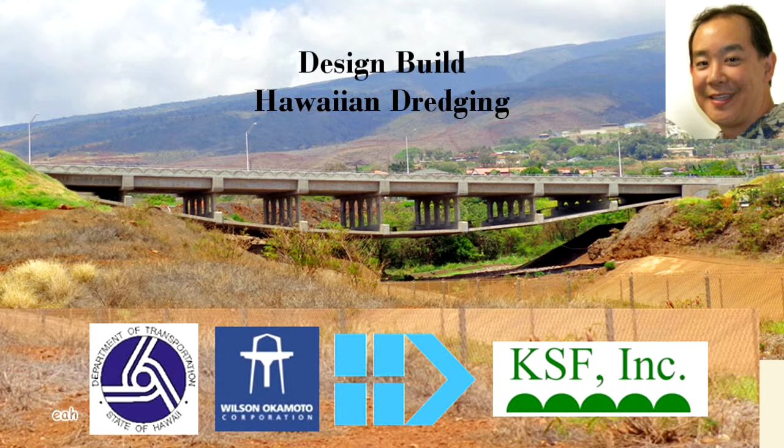Just a funny fact on them, a neat fact on them, is that this is their 110th year. They were started in 1904. Design-build consultant team, Wilson Okamoto, led the design team, and we also did civil engineering and environmental planning.

KSF, Eric over here, was our structural engineer of record. We also used GeoLabs, our geotechnical engineers. As you can see here from the rest of the team, we were a pretty highly qualified team. We had landscape, electrical, cultural and biological consultants as well. The team really worked well together with Hawaiian Dredging, leading the design and the construction on this design-build project.

From that, we communicated really well, we worked well together, and it was nice to get recognition from our peers. We received ASCE Outstanding Civil Engineering Award for this project. Another notable one is the ACECH Grand Conceptor Award.

I just want to go over a few project highlights before I really get into the details of the project. This is the Kahoma Bridge. It's the highlight of the project. It is a 360-foot concrete tied arch, or inverted arch bridge over Kahoma Stream, which is dry at the moment, and the bypass highway is on top.

Another feature designed by KSF, it should really say KSF Structural Engineers across the rail, the advertisement. But this is a 130-foot span, precast, parabolic arch girder bridge. It's a grade separation bridge, so the Lahainaluna Road is on top, the bypass highway is on the bottom.

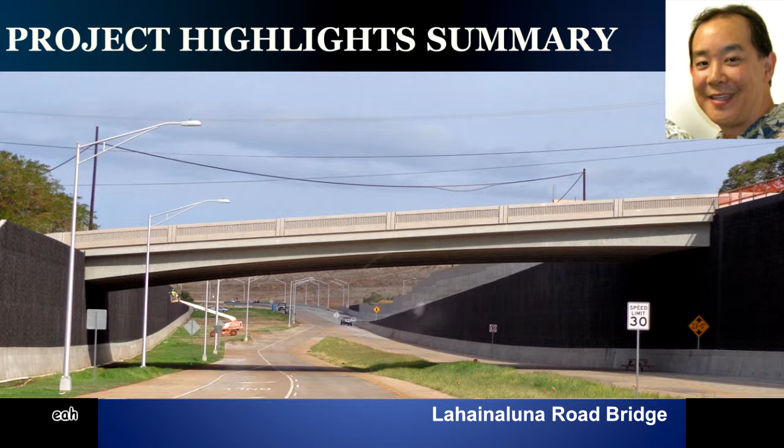This arch over here gets less than 4 feet deep. That was pretty amazing structural engineering by Eric. Unfortunately, he won't have time to go over this bridge today. We'll be focusing on the Kahoma Bridge in the latter half of this presentation.

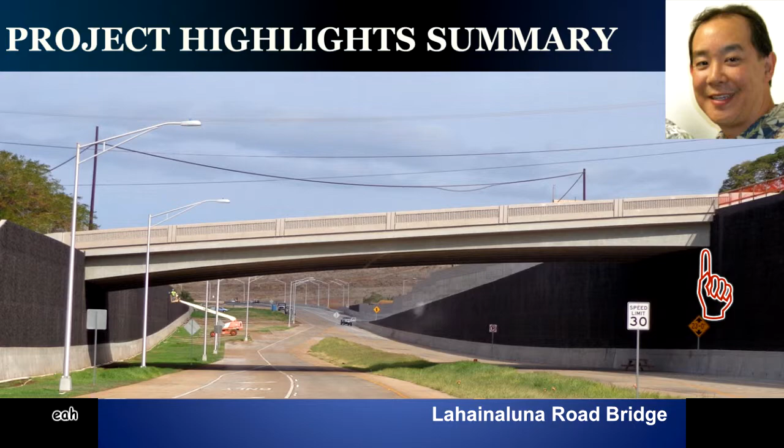Notice that this is 4 feet here. This retaining wall is another highlight of the project. That's a 35-foot tall retaining wall that GeoLabs here helped us design. We can see we're putting in some lava rock panels over it to help with aesthetics.

But the real feature of the wall, not shown here, is the anchor that's installed in the heel of the footing. There's an anchor that goes about 20 feet below the wall, spaced about, I think, 15 feet on center. That was a unique design that helped us reduce the thickness of the wall and reduce the size of the footings. These are pretty tall walls, L-shaped cantilever walls, all concrete.

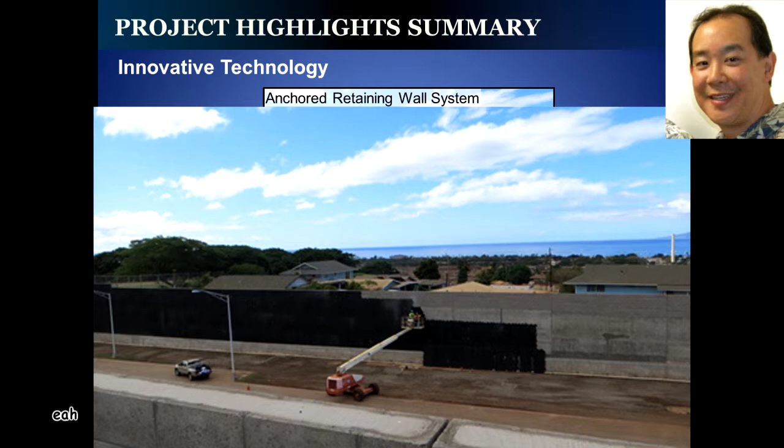Another feature from GeoLabs is the geotextile fabric wall. We were able to use on-site excavated material, and we crushed it and folded it up in the geotextiles and compacted it to make fabric, to make fill walls.

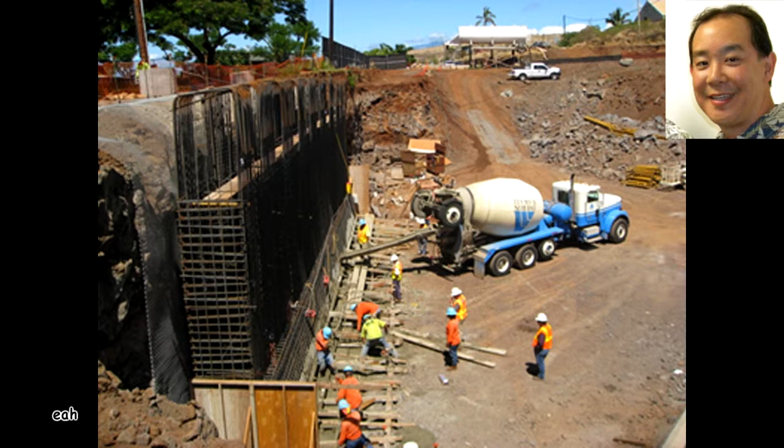Another feature of the project is the high-performance concrete. Again, going back to KSF and their excellent engineering on this project, they actually tailored concrete mixes for each component of the bridge, and in this case we see them pouring the abutment for the Lahainaluna Road Bridge. The mixes were tailored for workability, or to reduce shrinkage, or to increase the compressive strength. And some of the cylinders that we cracked were over 11,000 psi.

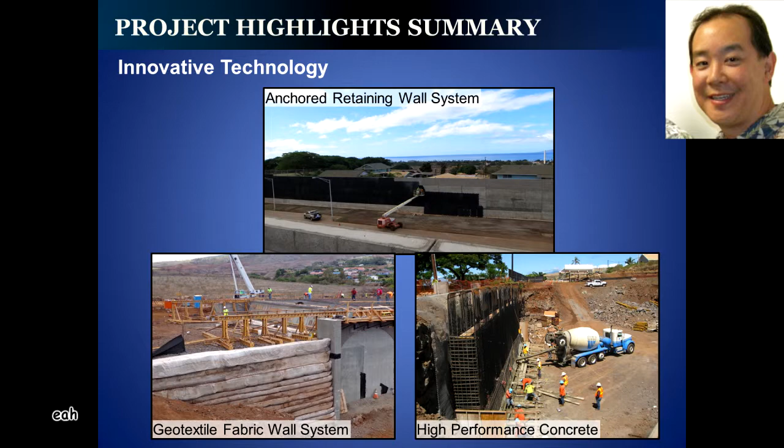As mentioned before, the project was very sustainable from an earthwork perspective. We used all of the excavated material either on-site or on the subsequent phase, the 1B1 phase of the project. It was used as general road fill or it was used as trench backfill material. We crushed it for aggregate base course, and we also used it in the MSE walls.

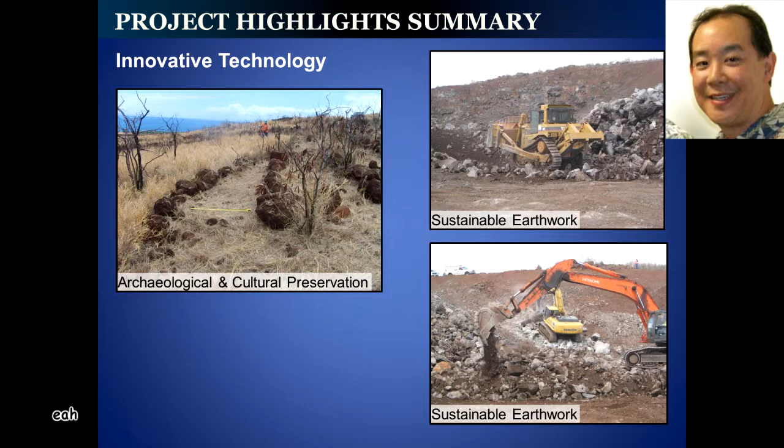Finally, right before the project was actually ready to construct several years ago, archaeologists discovered new terraces or archaeological features. We actually had to rush and redesign the highway to avoid and protect these, and Laura will go over that in just a few minutes. So you got to bear with me for a little bit more.

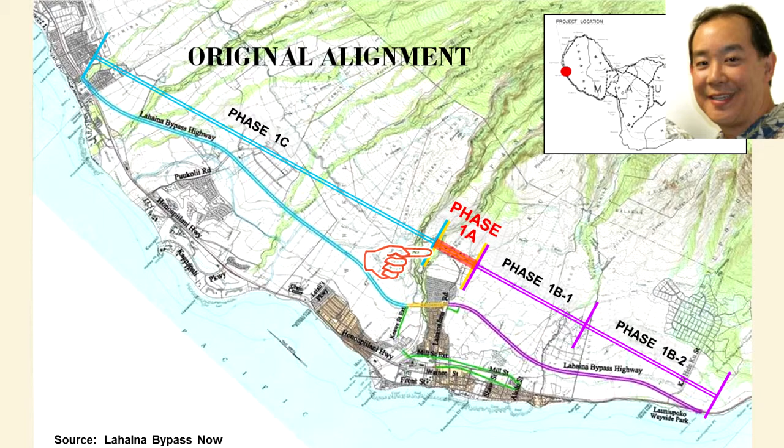This is a map of West Maui. This is the overall Lahaina bypass project. It's about 8 miles long. Our phase 1A segment is here in red and in yellow over here. We were just under a mile in total length.

Taking a closer look at the project, this was the original alignment before we had to realign for the archaeological feature. The main highway is up here. This is Kahoma Bridge, and this is the Lahainaluna Road Bridge. The purpose of the project was to alleviate traffic at this intersection here, a signalized intersection. Traffic would back up in both directions as people tried to access the school complex.

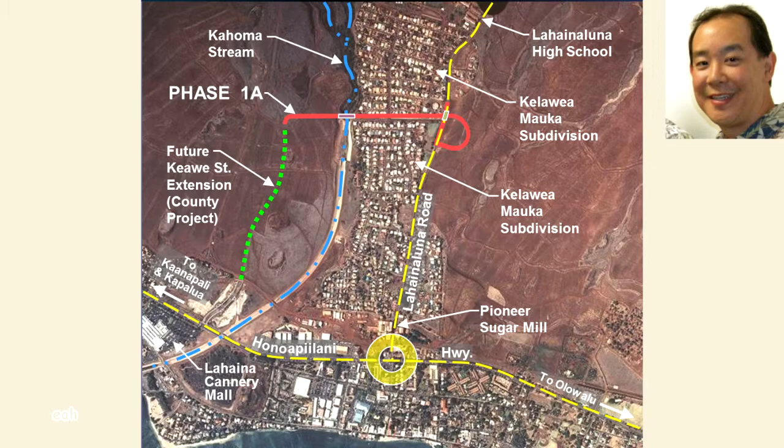There were 3 schools up here. After we installed the project, which opened in April 2013, there was noticeable relief on the highway. This here is another sketch of the original alignment. Here we can see the modified alignment and the archaeological feature that we avoided. Again, Kahoma Bridge is here, this is Kahoma Stream, and Lahainaluna Bridge is here. There's an off-ramp loop, and the Keawe Street extension was also incorporated into the project.

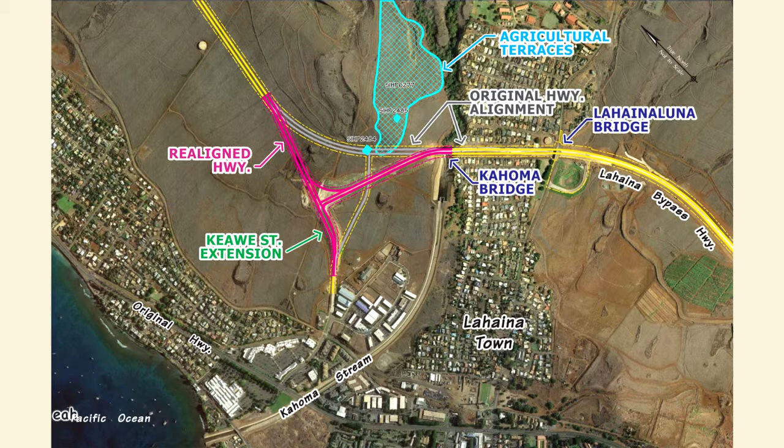And from here, I will give it over to Laura. She'll tell you why we did this crazy thing.

Thanks, Brian. So as Brian said, we were ready really to start construction. We had received NTP on this, and we had gone out to the community already, and we thought that public information meeting was to give notice to the community that we were going to start construction. Just prior to that meeting, however, we had a routine meeting with the State Historic Preservation Division to go over what had previously been done with all the prior archaeological studies. At the time, all of the environmental clearances were completed, and again, FHWA and DOT thought we were good to go.

As a result of the meeting with SHPD, Wilson Okamoto and the archaeologist, Cultural Surveys Hawaii, went out and did subsequent field survey and found that there was an additional archaeological site that was previously undiscovered. It turned out to be a very massive agricultural complex shown here in green. It's approximately 33 acres, a portion of which was right in the original alignment down here.

The red line denotes not only the slope easement here, but also the new right-of-way that was actually created for the project. Down here shown in green was a previously discovered L-shaped enclosure that was already inventoried, and we thought that one was good to go as well.

To our surprise, this is that same little green square. The portion that was previously discovered really entailed only this outside wall, but when we did a little more homework, we found that there was a very intact system of agricultural terraces and auwai. Much of this was dated back to pre-contact times as well, so it was very significant.

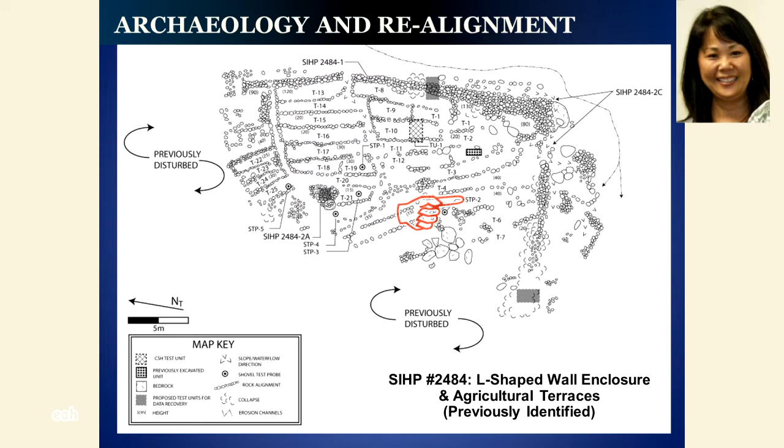And this was that prior picture that Brian had shared with you. You can see here very defined rows where the terraces were. Let me back up.

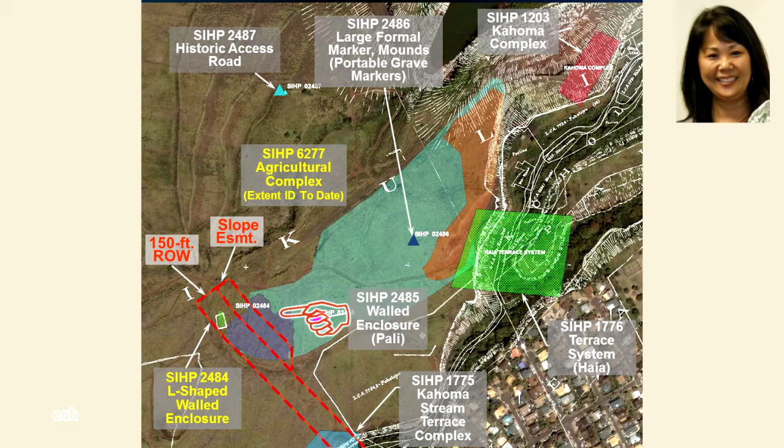The next set I'm going to show is a close-up of this little purple area that was directly impacted by our project. That site was noted as Site 6277, and again, it turned out to be a very well-defined complex of agricultural terraces and an intact auwai system.

The area shown in the yellow band is the slope easement. The area in the brown band is the new 150-foot right-of-way. So clearly we were impacting a very significant portion of this complex.

Was this taro? They think it might have been sweet potato. They weren't sure, but prior to the sweet potato, we were not sure what was farmed there.

The trenches all came back clean, but we did find some surface features which involved these agricultural push piles. One of the lessons learned on this project was that previously we thought agricultural push piles were considered insignificant, previously disturbed materials. We also thought previously agricultural plowed lands were fairly insignificant because they had been disturbed. What we found, and one of the lessons learned on this project, was that in fact there could be subsurface sites below the plow line, which was the case with another project further downslope of ours. What was the result of these new discoveries?

We had to go through a number of regulatory triggers, two of which were state and federal EAs and compliance with Section 4(f) of the Department of Transportation Act. Section 4(f) administers public parks and recreation areas, public refuges, and historic sites. In our case, the trigger for Section 4(f) was the historic site.

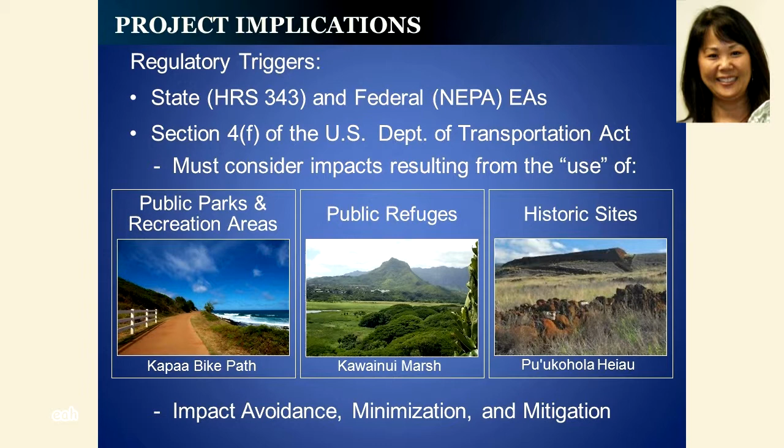What this requires is that the federal agency go through avoidance, minimization, and mitigation measures with respect to the resource being affected. I'm going to focus more on the last trigger, which was Section 106 of the Historic Preservation Act. It was a very challenging process for us to go through.

This requirement is triggered anytime you have a federal undertaking where you have federal funding, a federal action, or a federal permit. The process needs to be completed before FHWA or any other federal agency can authorize the project, and it requires consultation with major groups, including at the federal level, the Advisory Council on Historic Preservation, the SHPO, as well as Native Hawaiian organizations and the public at large.

We did extensive consultation with a number of NHOs, or Native Hawaiian organizations. It included lineal and cultural descendants who had direct ties to the three ahupua'a that were being affected by the project. It was a very sensitive issue, and it created heightened sensitivity just because of the nature of the project.

We got to meet with some of the families on a very intimate level. Lahaina was the leading area, so the land tied back to royalty and rights. These people were very passionate.

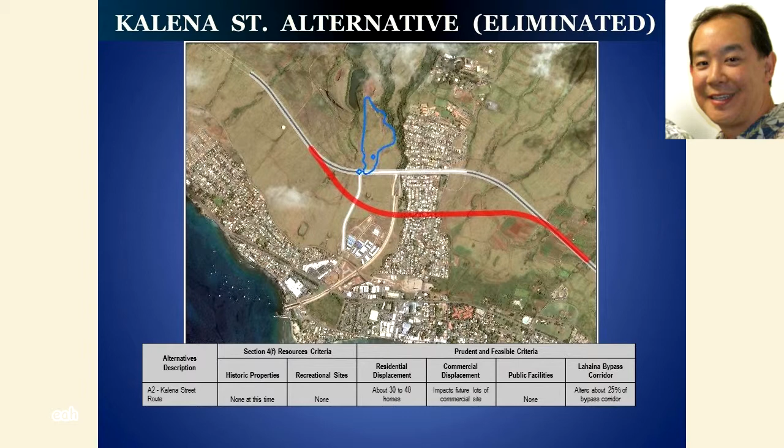So we eliminated that. Another one that didn't take any houses was a cane haul route alignment following an existing cane haul road. There would have been no impact to homes. It would have been a good alignment. However, the existing highway is right next to it, so it really negated the effect of a bypass, and that's why this was eliminated.

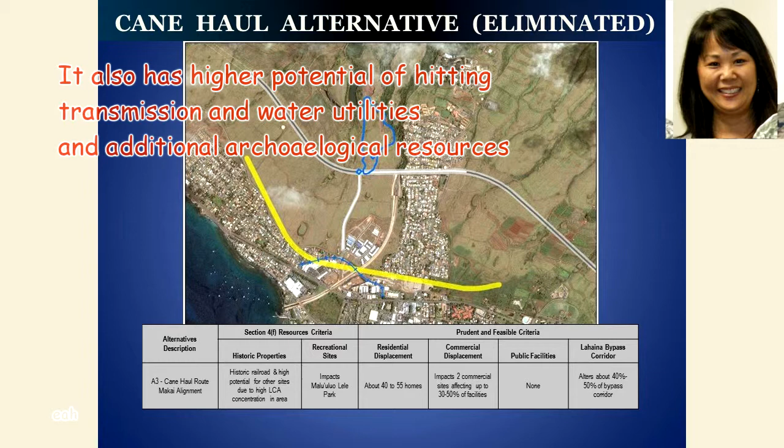Those have a higher potential of hitting land commission awards and more additional archaeological resources. This is another, shorter realignment that additionally took another 50 homes in this area, but it did avoid the highway. It was eliminated because of the impact to the homes.

This is a couplet alternative, so we tried to narrow the right-of-ways to minimize the amount of homes that would be taken, but we still had to avoid the site, so we still took homes here and here. So it was eliminated, but it was a higher cost option because now we had 2 bridges crossing the stream.

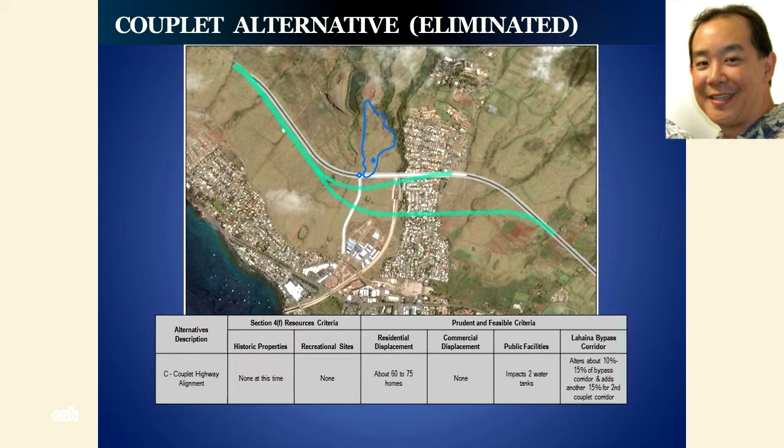So this, again, is the original one I showed you before, and that's how we turned the highway to avoid the archaeological resources. Now you guys know why we did that. It's one of the, maybe not the first time, but one of the few times that DOT has listened to the public, has tried to preserve a significant cultural resource, and we actually made some drastic changes to this highway.

We made a T intersection. It's signalized in the future. There is a free flow right in the past, but our project was basically this portion all the way up to the off-ramp loop.

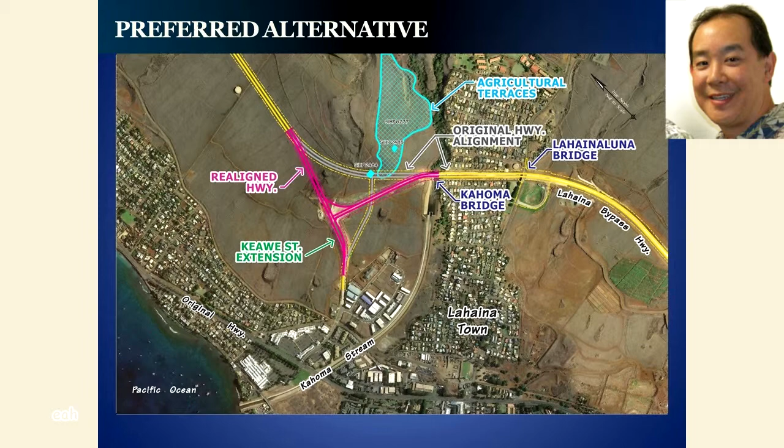This is the next phase, 1B1, which has been constructed. From here on, this is phase C, which hasn't been constructed yet. But the most drastic effect was to Kahoma Bridge. In order to save the homes, we had to turn the highway over the bridge, and that significantly changed the structure. It super elevated the deck. A structure that was previously uniform was now curved, and all the pieces were different. So I will let Eric loose on you now and let you know how he solved all those problems.

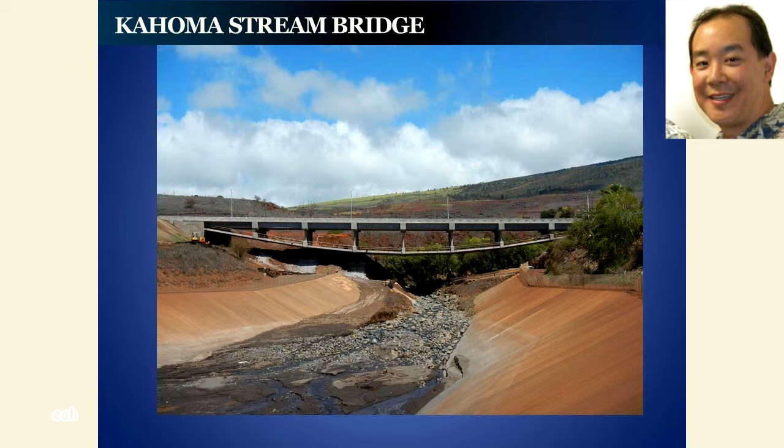Thank you, Brian. So Lahaina bypass crosses Kahoma Stream with a low-profile 360-foot single-span, 60-foot wide inverted tied arch bridge. It consists of a unique combination of precast, post-tension, and cast-in-place concrete. The final configuration evolved through the consideration of material strengths and capabilities, utilizing concrete compression members and post-tensioning strands.

Here's the picture of the bridge, and our elevation of the bridge in plan, and this is our cross-section of the bridge. On the right side, you see a potential future bridge.

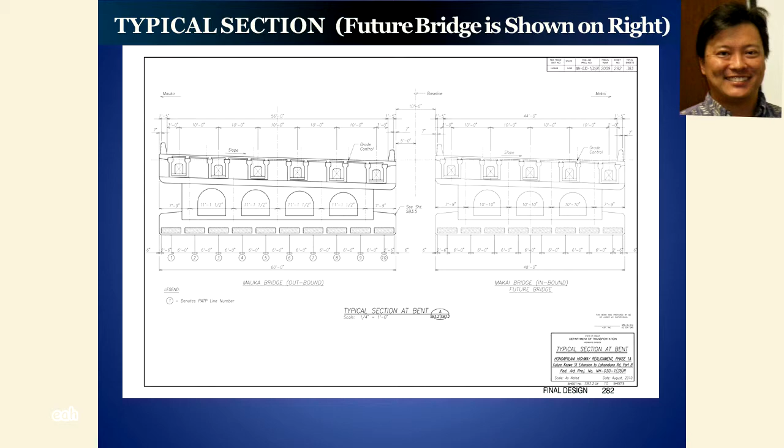The bridge bottom chord consists of 10 lines of precast arch-type planks, or PATPs, that are joined together with post-tension strands. Post-tension strands are anchored at the abutments, or end blocks located at the abutments. If you can imagine these PATPs as dried pasta, and you put a piece of string through it, and when you yank it up, it goes up. So this bottom chord, or the PATPs with the post-tensioning, provides a lifting force for the bridge.

The top chord consists of precast concrete deck panels, precast concrete tub girders, and a cast-in-place deck. The concrete girders run longitudinally with the bridge and span between the concrete bents. On top of the girders, we have precast deck panels. These components are then tied together with a cast-in-place deck. The bridge top and bottom chords, along with the post-tensioning, are then connected to the end blocks at the 2 abutments. The cast-in-place end blocks also contain friction pendulum bearings.

This allows the bridge to move, whether it's seismically or due to temperature and shrinkage. In the final configuration, the bridge is self-anchored. Again, the top chord directly supports the vehicular loads, which are then transferred to the bents into the bottom chords, the PATPs, which are taken back into the end blocks and down through the friction pendulum bearings and abutment footings.

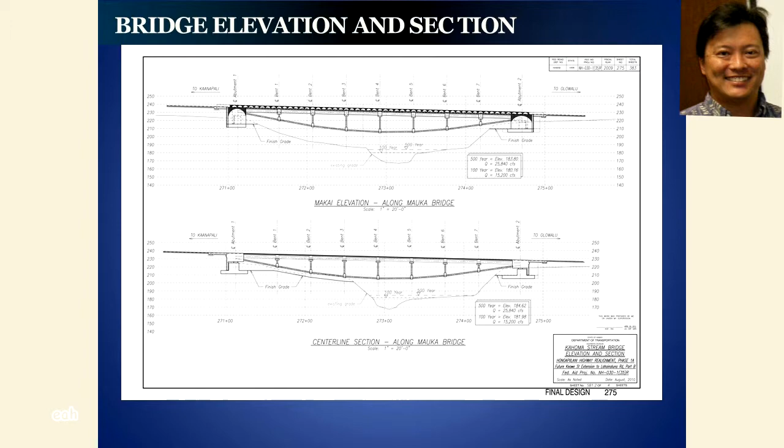We spent a great deal of time constructing a 3D finite element model. Some of the engineers probably know Dr. Harold Hamada. He worked on this 3D model for quite some time, and we went through a number of iterations until we felt comfortable with the results. Once we were comfortable, we focused on the elements. These elements were modeled in our LUSAS program, and this allowed us to understand the overall behavior of the structure and each component, and to address the issues accordingly.

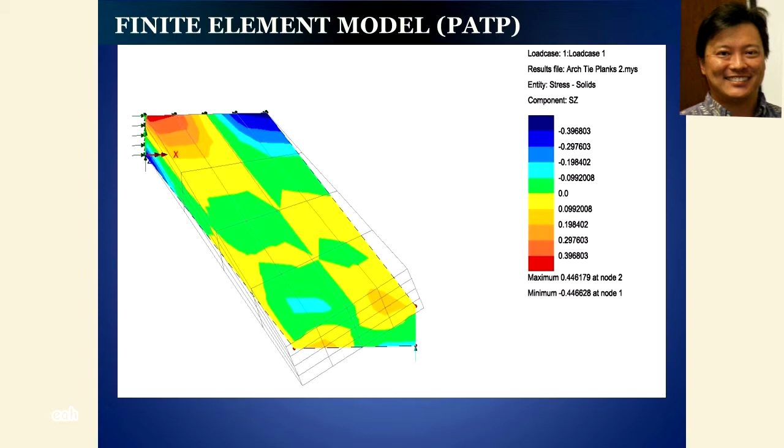The analyses also accounted for the different phases of construction: transportation, bracing, and final configuration, to name a few. As for the results, just to give you an idea of the forces and moments we were designing for, the dead load of the structure is about 18 million pounds.

Since this bridge is on a curve, it wants to twist to the outside. Imagine half of a hula hoop - if you were to hold the ends, it would turn to the outside of the curve. This twisting was about 80 million foot-pounds, and the axial force in the top chord, where it compresses, was about 36 million pounds.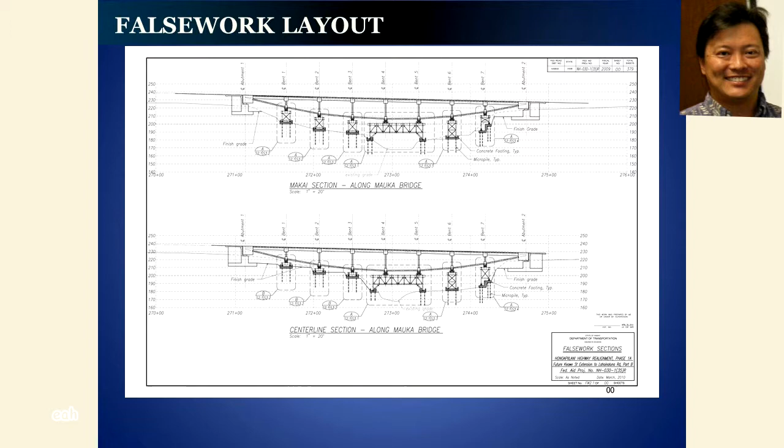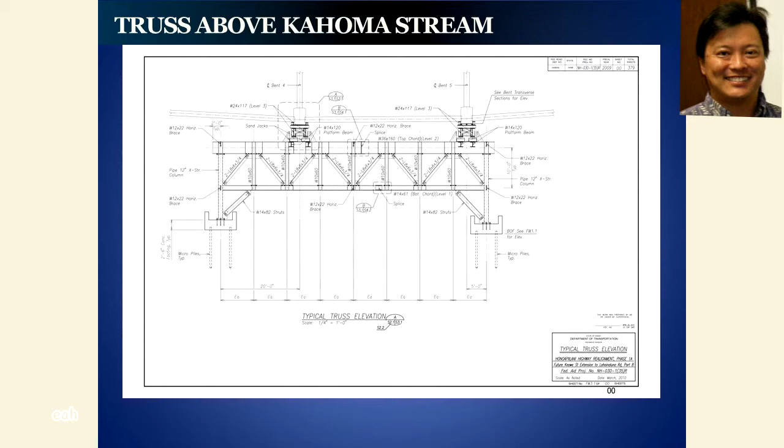We also designed the truss to span Kahoma Stream. The length required for this truss at the bottom was about 65 feet. We were then able to construct bents 4 and 5 without any disruption to the stream below. The truss was designed for about 1.6 million pounds at each bent.

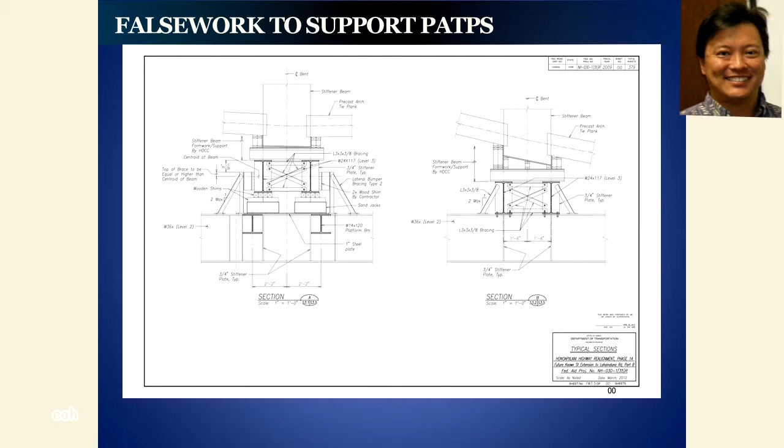We also had to account for the slope of the arch-type planks. You may have noticed the bottom chord was a parabolic shape, so we had to make sure that these pieces did not slide downhill before they were connected.

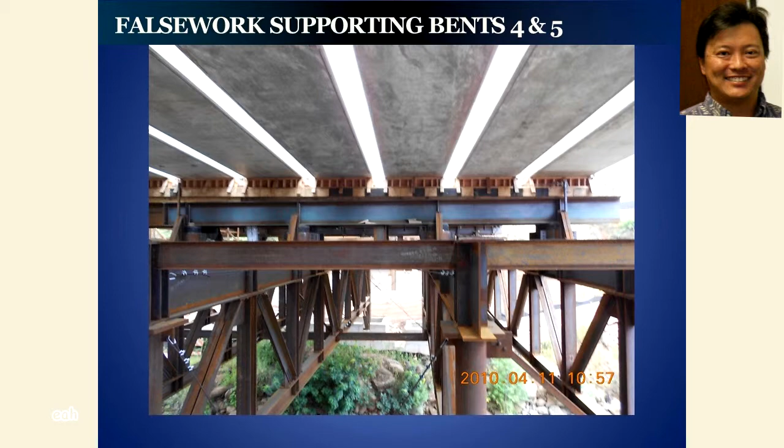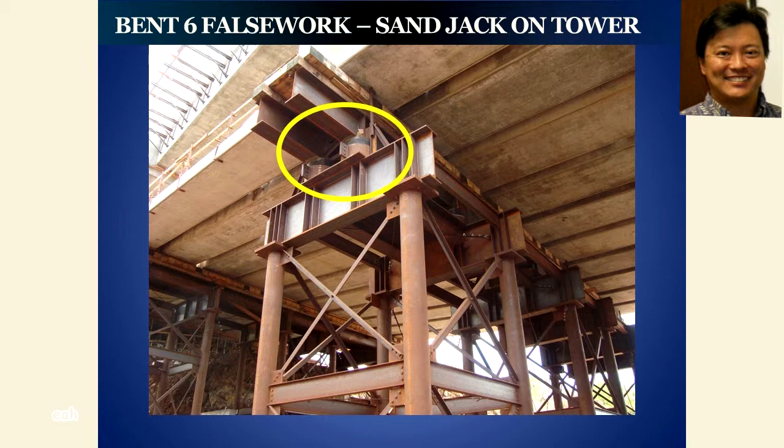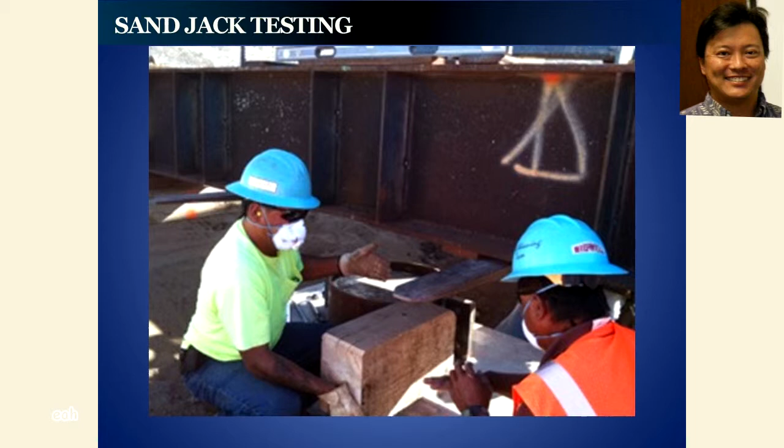We also designed an apparatus to test these sandjacks. Here are the steel pieces put together to form a ring. We tested the sand to see which type was most appropriate. We selected a fine manufactured silica sand, so extra precaution had to be taken so it would not be inhaled. Here we are placing the sand, making sure there is no moisture.

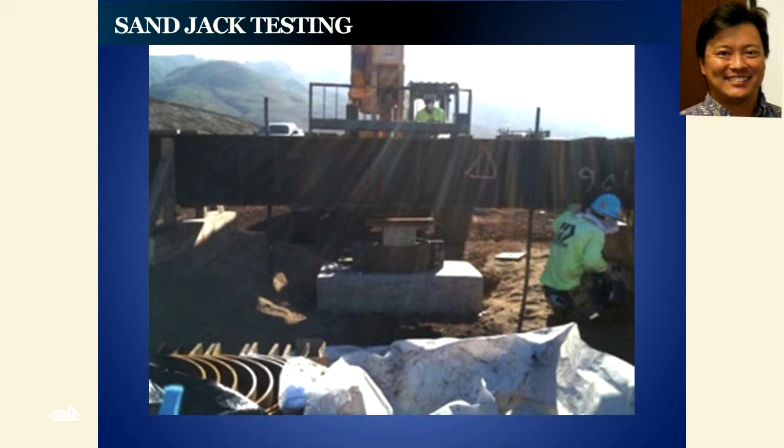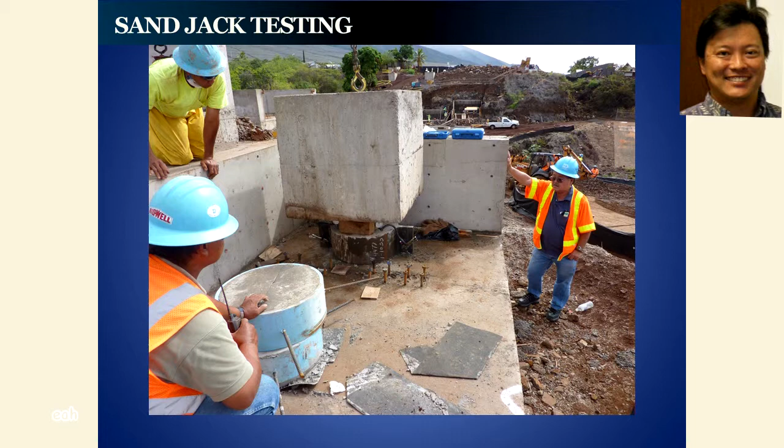We then tested the sandjack for load capacity and displacement. Here's a closer view and another view of the test. We also went through trial runs until we were confident the sandjacks could be used. Here the sandjack was released, the sand came out, and the 2.5-ton block above it settled uniformly. So no problem, right?

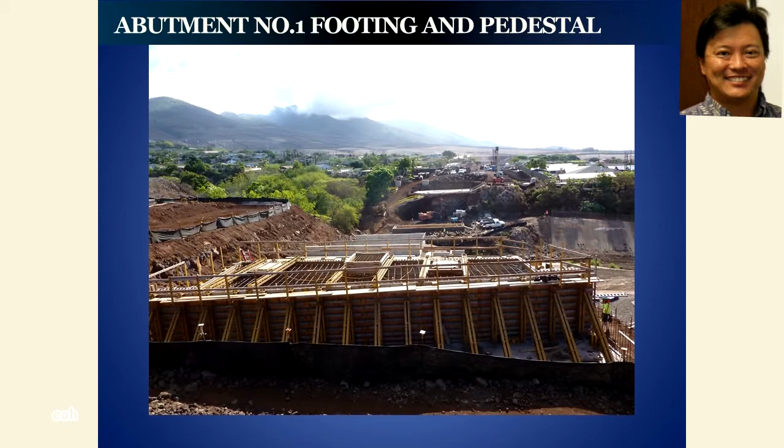Here's a picture of abutment 1 looking towards Kahului, waiting for the concrete to be poured. At each abutment we placed 2 friction pendulum bearings to accommodate movement of the structure. The bearings were placed between the abutment pedestal and the end block above.

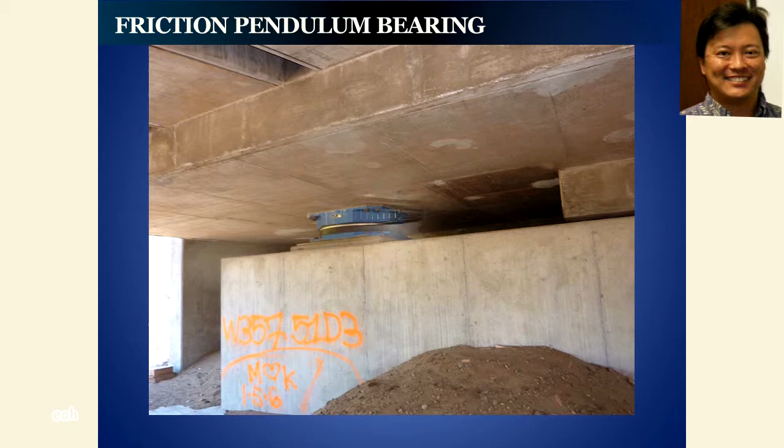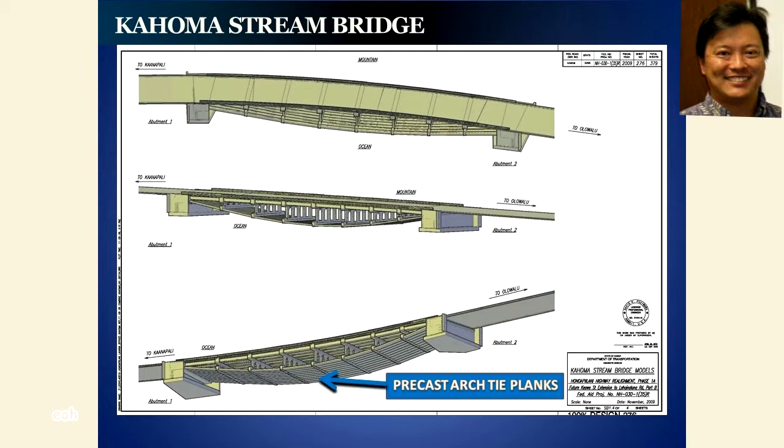While we were placing the falsework, Hawaiian Dredging started with the precast. All of these precast components were fabricated in the contractor's base yard about 2 minutes away from this site. But if we were to precast these elsewhere, they would come from the mainland or Oahu and have to make the 1-hour journey from the port in Kahului. This route contains numerous horseshoes and tunnels, so there would be a lot of disruption to traffic. Now I'll go over the individual elements, starting with the precast arch tie planks.

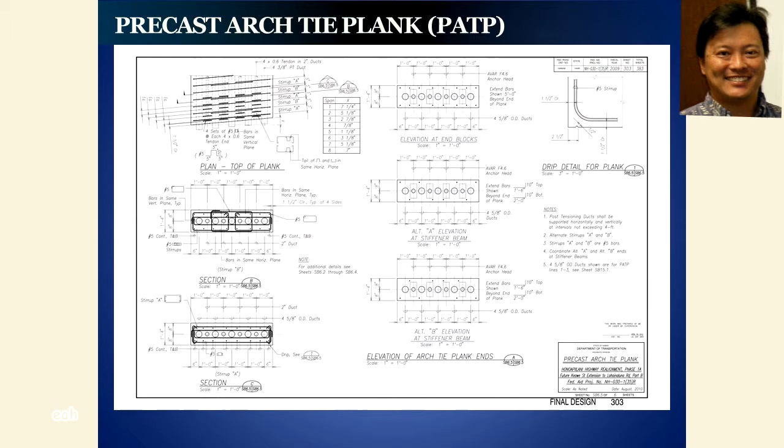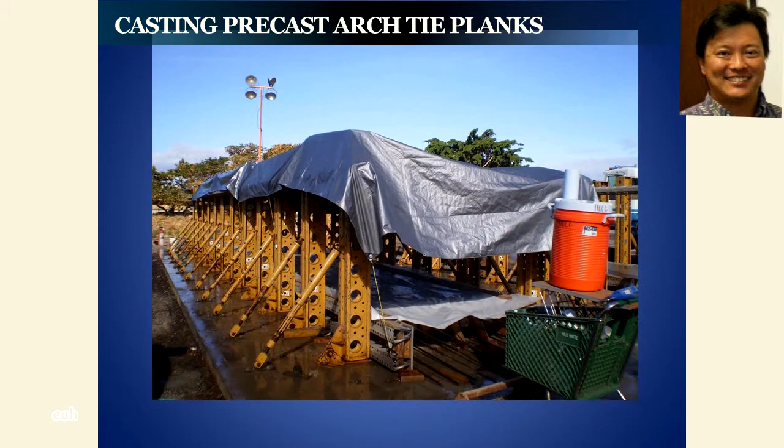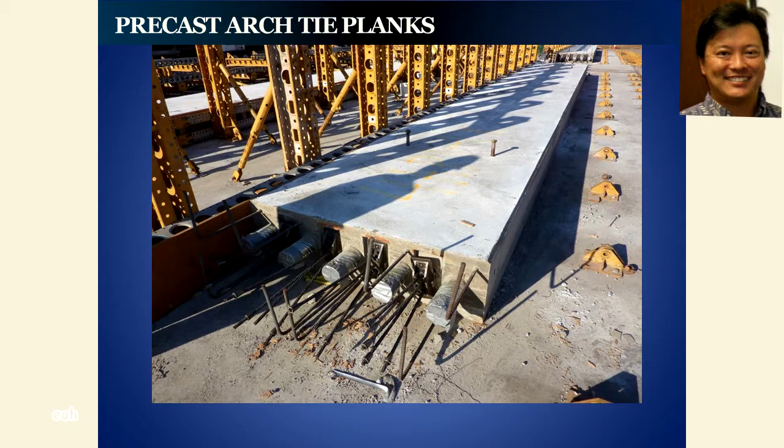Here's a picture of the workers finishing the top of the PATPs. We then cover and shade the newly cast piece. These planks were post-tensioned for their simply supported condition during transportation, as well as for bracing our bents. There were 4 strand tendons for this load case, and here we are with Raymond stressing each tendon to about 44,000 pounds.

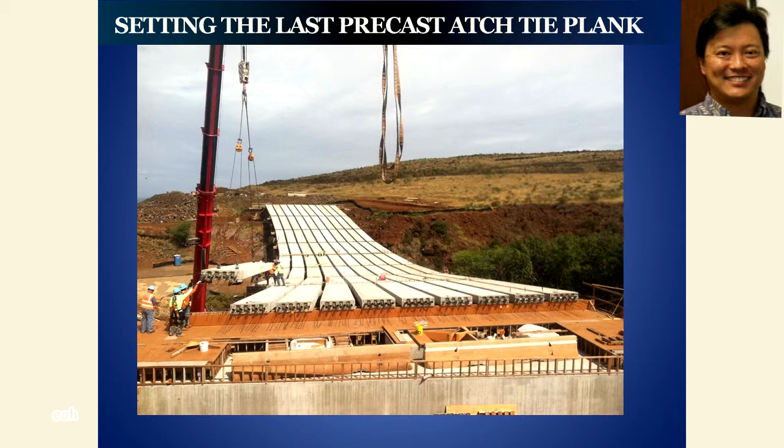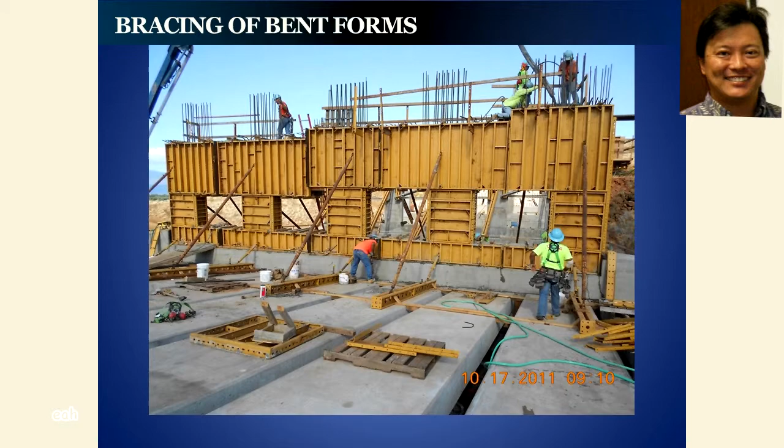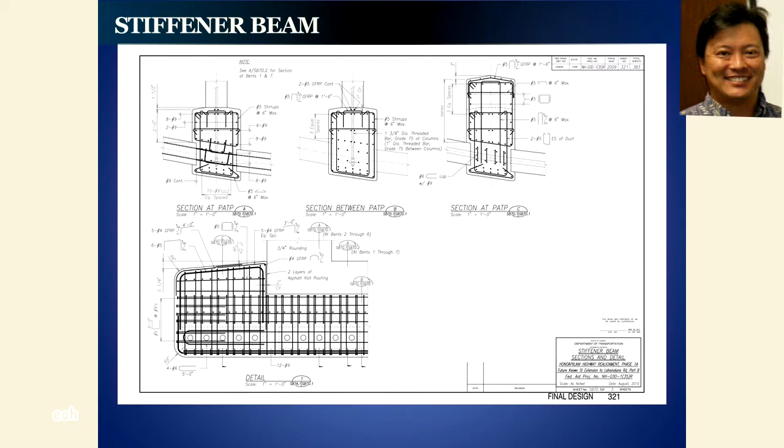These PATPs are then tied at each bent with stiffener beams, which contain mild reinforcing and were used to splice the post-tensioning ducts. Here's the transverse view - you can see Lanai in the background. One good aspect of this bridge is that the main structure is below the roadway, so it will not destroy any views of Molokai or Lanai.

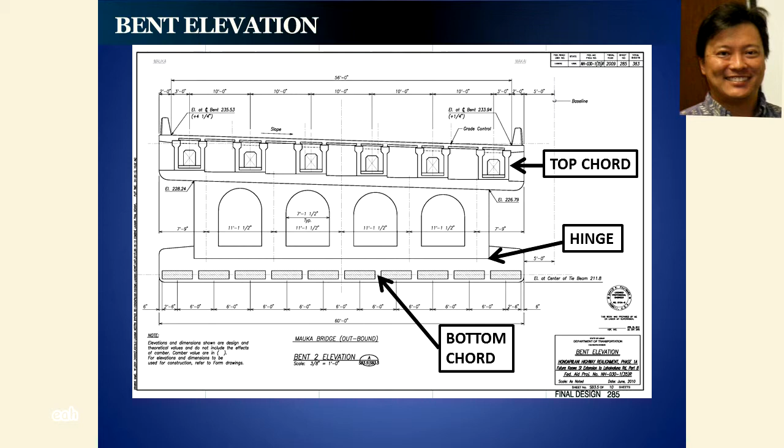Here's a longitudinal view of the stiffener beam. These beams provided lateral stiffness for the bottom chord and served as supports for the bents. The connection between the bents and the stiffener beams was designed as a hinge. Our analysis found that a small, minute movement at this point significantly reduced the moments in that bottom chord, so we placed a small layer of epoxy.

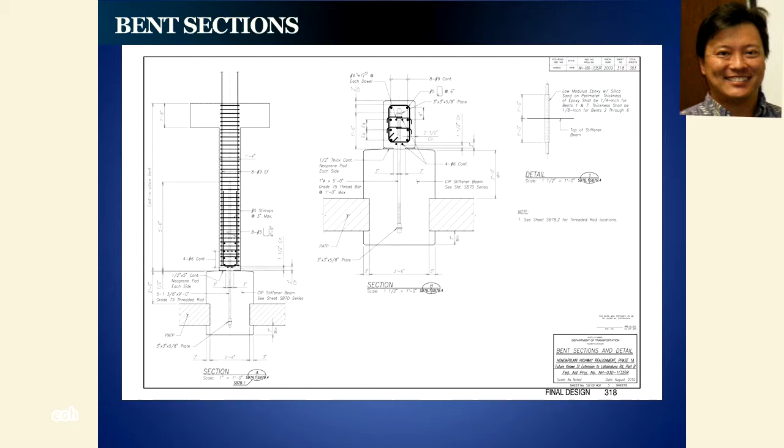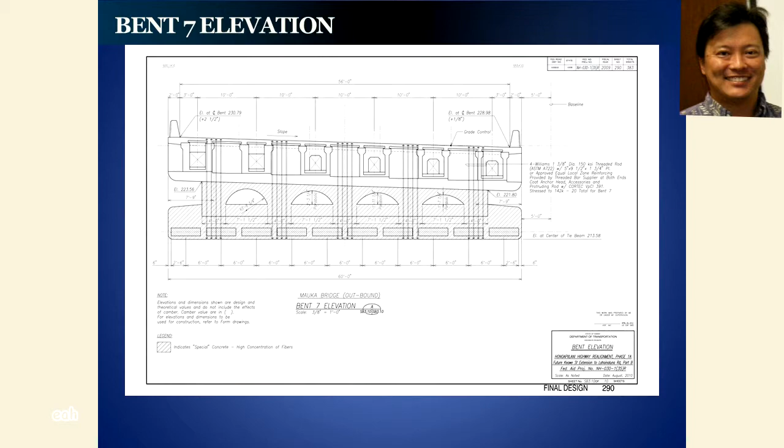So the PATPs are in place, the stiffener beams cast. Now we are ready to cast these bents, which are about 12 to 25 feet in height.

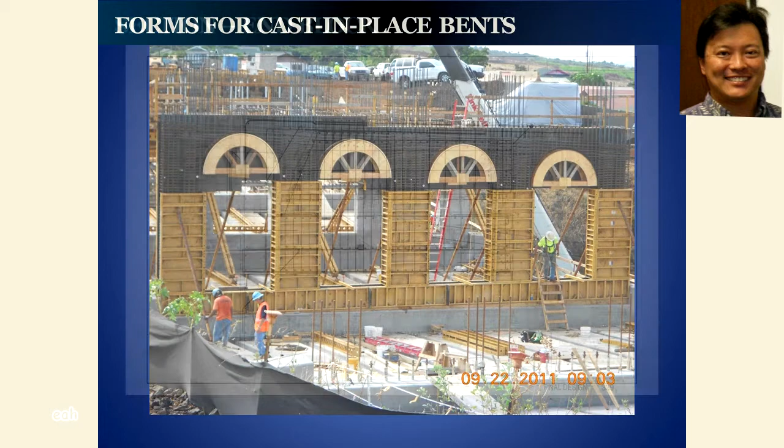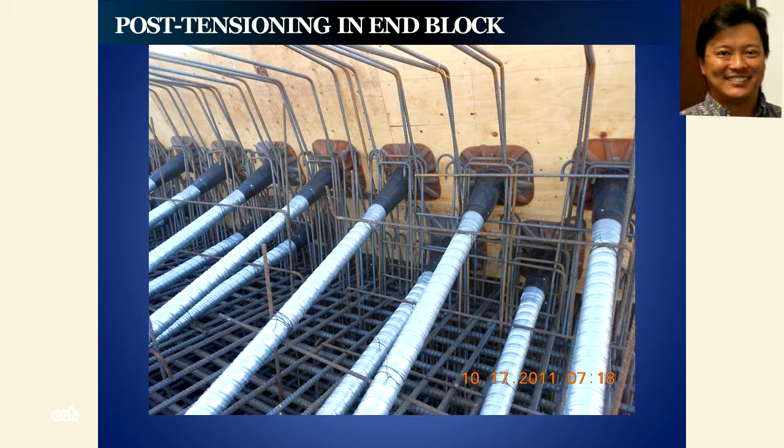While the bents were being constructed, we also cast the bottom portion of our end blocks. This is where all the forces from the top chord, bottom chord, and the reactions converge, and this is also where the post-tensioning is anchored. Here's another view of our post-tensioning. So once the rebars are set, we're ready to pour the concrete.

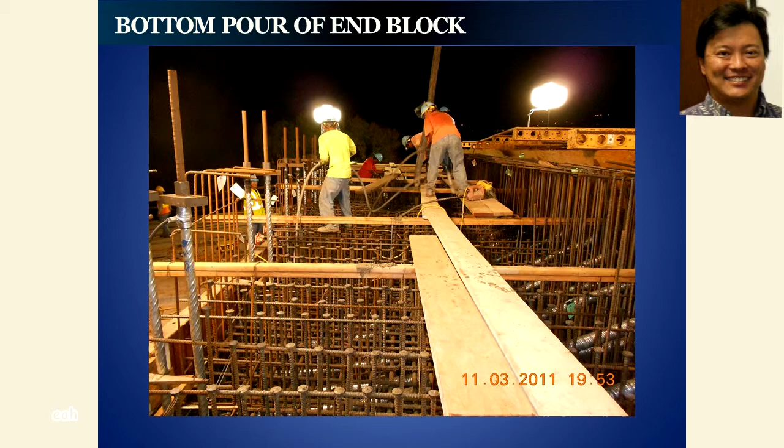And the bottom portion of our end block is backfilled with a geosynthetic reinforced soil system.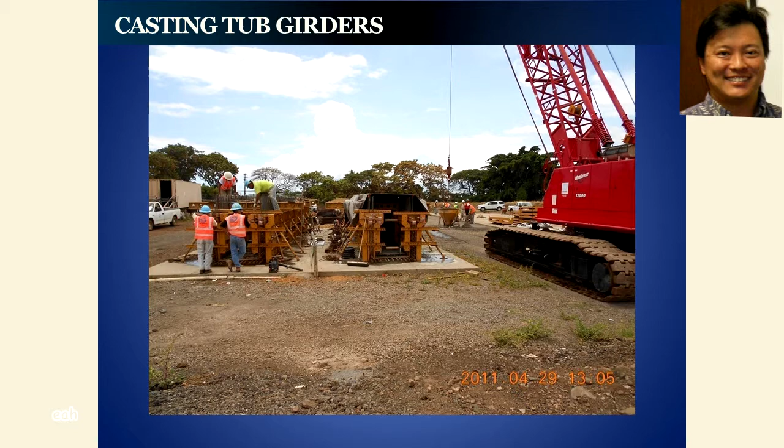Here we are setting the girders, and another view of the tub girder placement. And to tie these tub girders to the bents, we pour this cast-in-place piece.

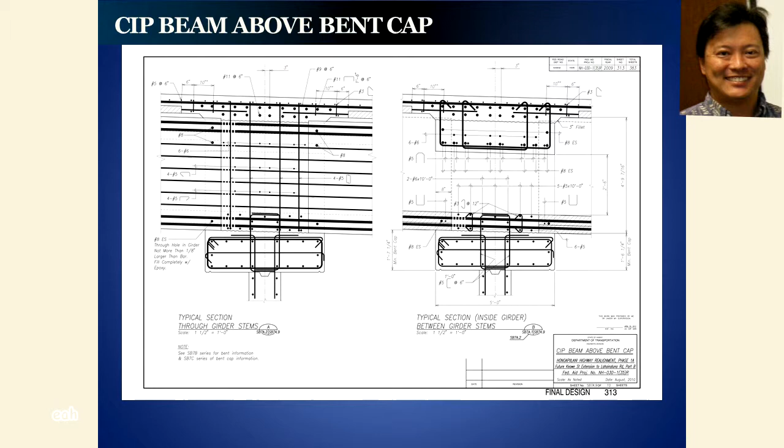And finally, for our precast elements, we have the precast deck panels. These panels sit on top of the girders and function as stay-in-place formwork. There are 132 of these members, 3.5 inches thick by 18 feet long.

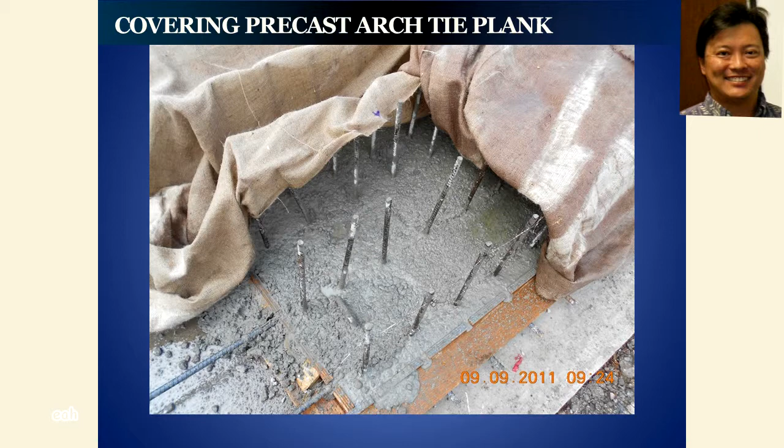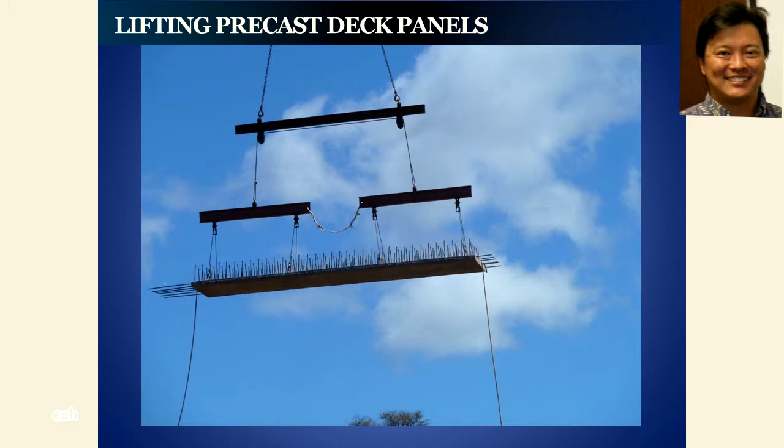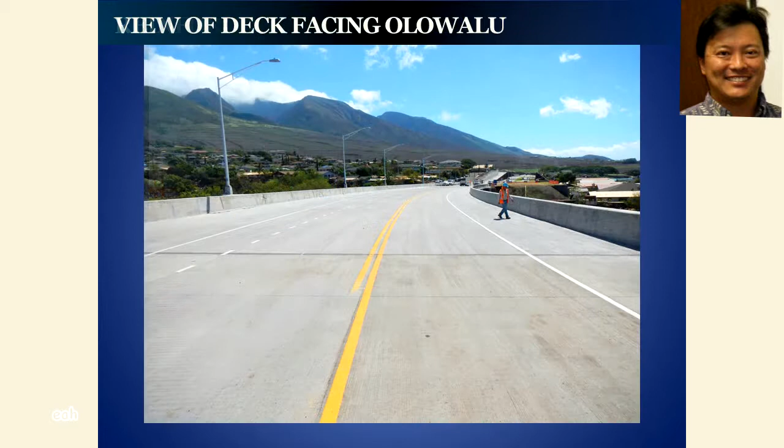And now we're ready for the post-tensioning. Here's the layout of the post-tensioning anchors at the back of our end block. We had put more force in the tendons on the outside of the curve to counteract the twisting.

And here we are cleaning the ducts. We place the hydraulic jack over the tendons, and then we are able to post-tension. We then grout the ducts, and now the bridge is completed, and we have to release our falsework.

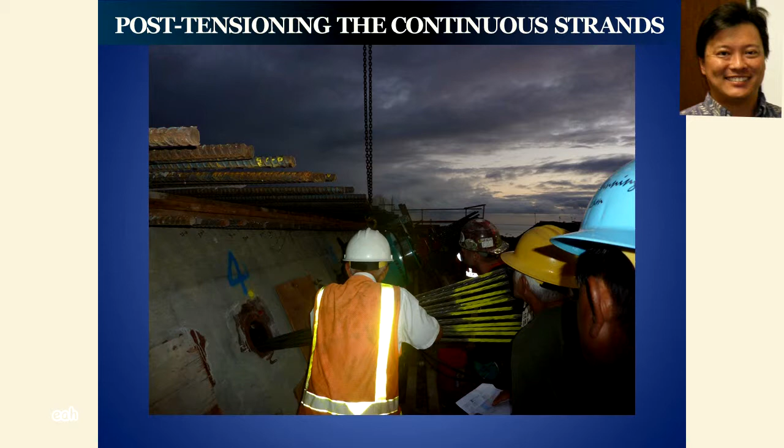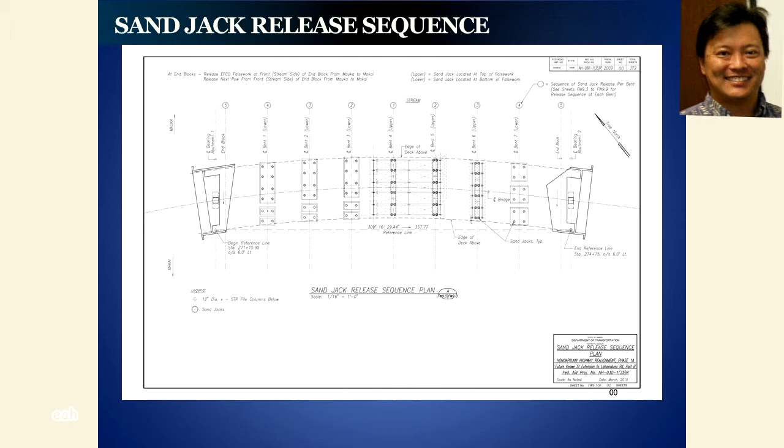So the moment of truth. We did give the contractor the sequence to release these sand jacks such that it will not overload the bridge in any way. A plan of our bridge shows all our sand jacks and the sequence in the Mauka and Makai directions.

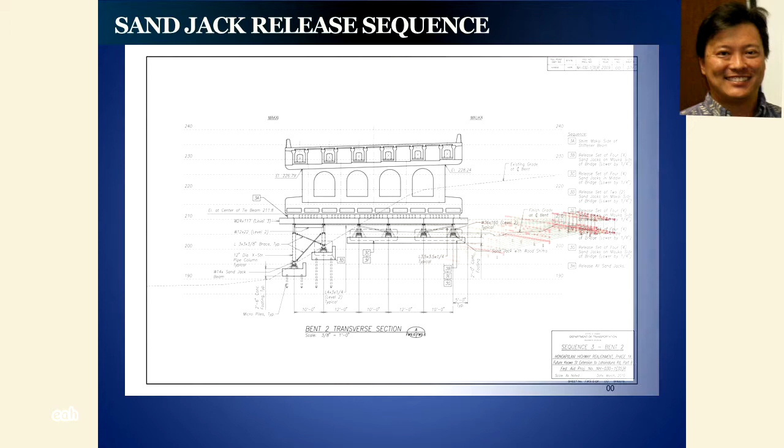And Harold Homada also checked this 3D model out to verify that the release sequence was safe for the structure.

And Hawaiian Dredging said, to show confidence, you have to stand underneath the bridge while they're releasing the sand jacks. So I was there with them.

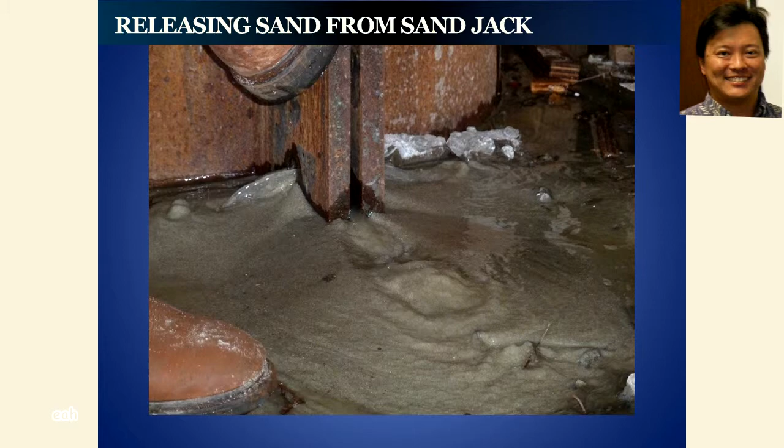Unfortunately, moisture caused a problem, so the sand was a little hard. So what we did to resolve this issue was add more moisture. With the water, the sand was able to come out easily, and then the shoring towers were able to be lowered in a uniform manner.

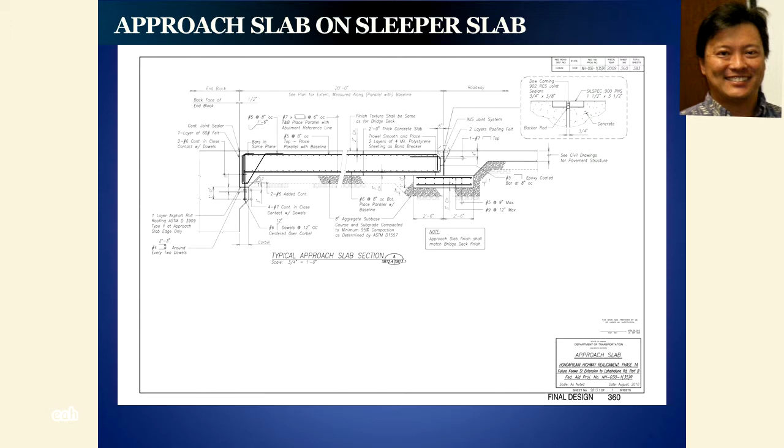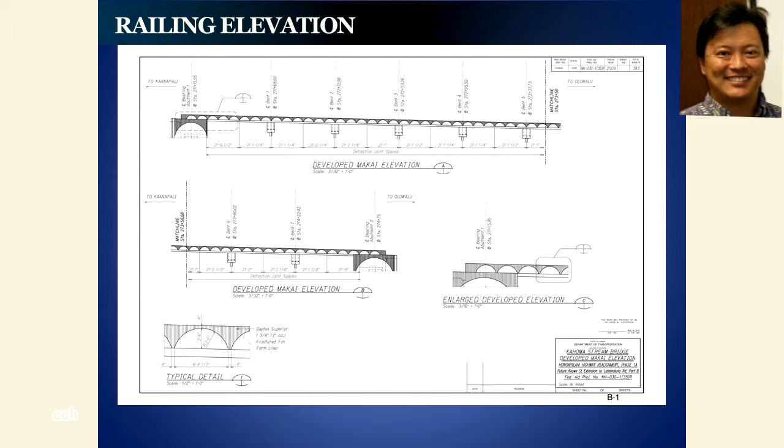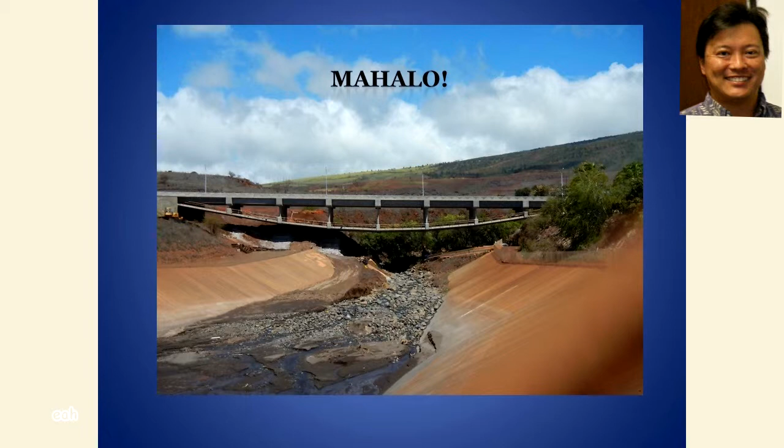What did it cost? So the official cost for this bridge was probably about in the $18 to $20 million range, but the contractor would not provide a complete breakdown, but that's the range that was given to me.

Yeah, so the initial project cost was about 49 million, and then the final project cost after we realigned everything was close to 80 million.

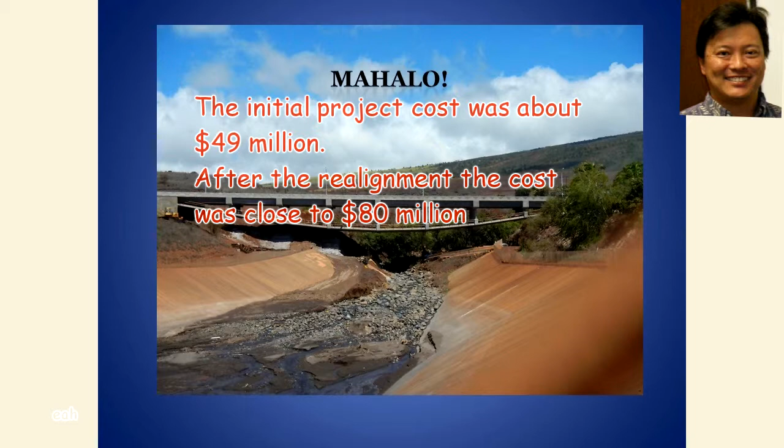Okay, you folks, that was one fantastic project. And now you know why I convinced my fellow judges to vote for this project as the grand conceptor.